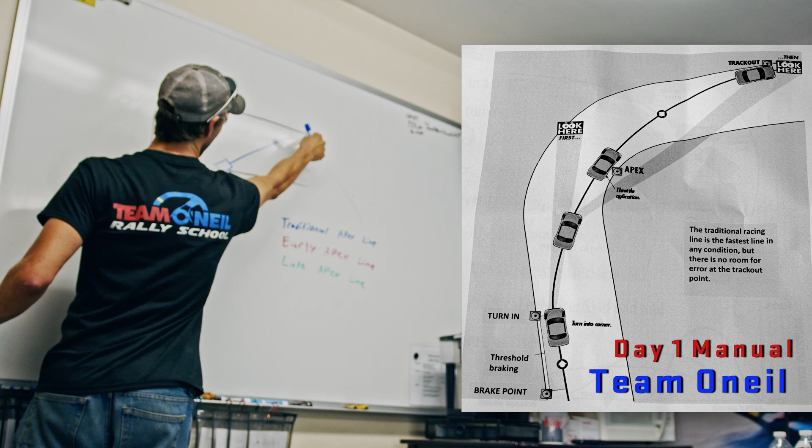So without a doubt, this opens that corner up and straightens it out as much as possible. If you knew the situation, knew the road and all that stuff, this would be your fastest way through the corner. The problem is road racing sees the same 10 corners 100 times. In rally, we see 1,000 corners once.

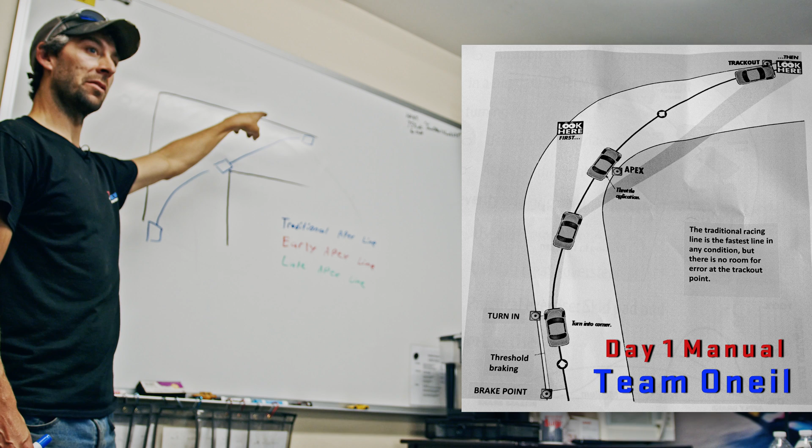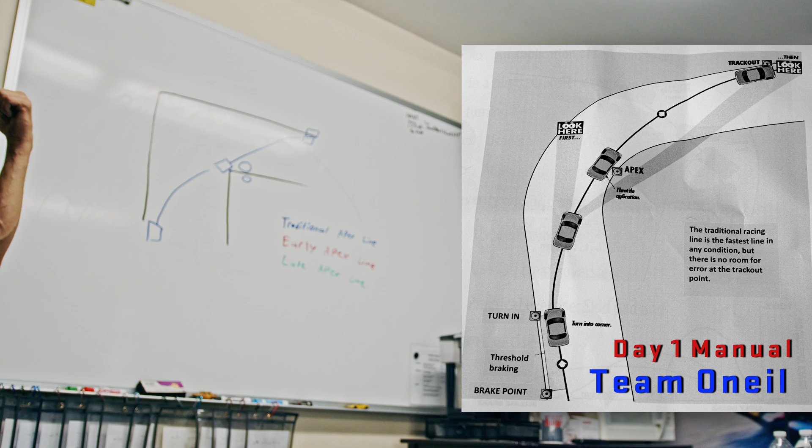So you typically don't know what's on the other side of that. So when you use this line, if there's some trees creating a little shade on the road, and there's a slick spot - I know you guys felt some different changes of material out in the slalom and skid pad area - you come into that, you don't account for that little spot, you misjudge your speed into it. Goodbye. Now you're off the road. And is that okay? No, because now you're breaking rule number 1 and probably rule number 2 as well. You're going off the road.

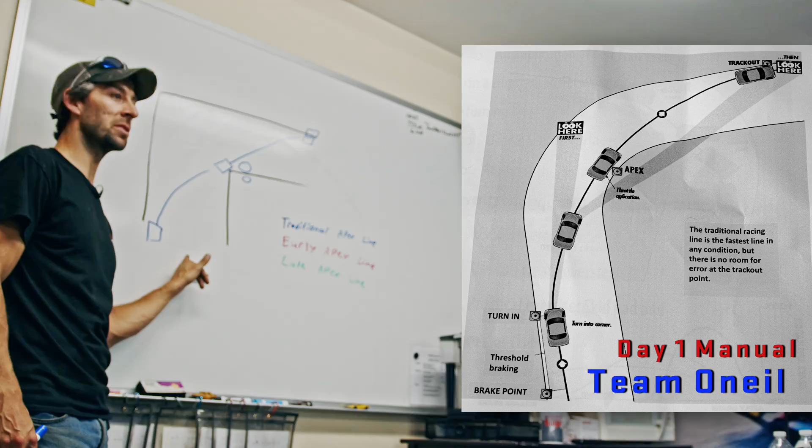So this line can be the fastest, but it's not going to get you to the finish on most events. You might get away with it for 9 out of 10 corners, but that 10th turn is going to screw you over every single time. So this isn't our safest line. Can be the quickest, but not our safest.

We actually try not to use it too much, because the other thing - you guys have seen the slalom - it's right, left, a lot of back gravel roads, there's a lot of turns going the other direction. If this thing starts switching on me the other way, is he set up good for that next left-hander now? No. So that's another reason why we stay away from this line.

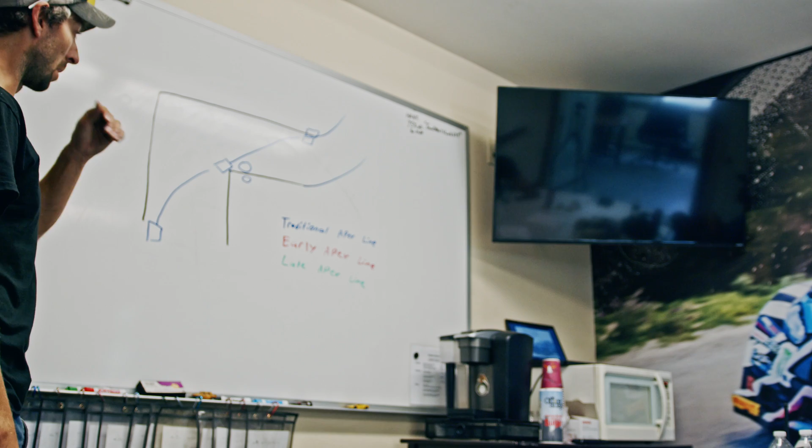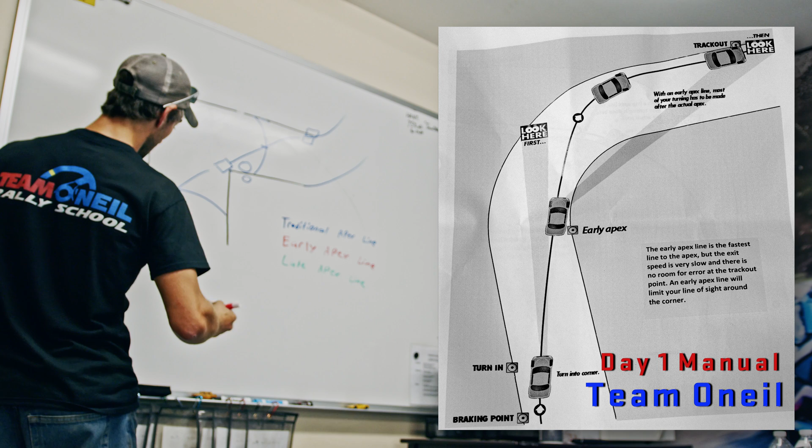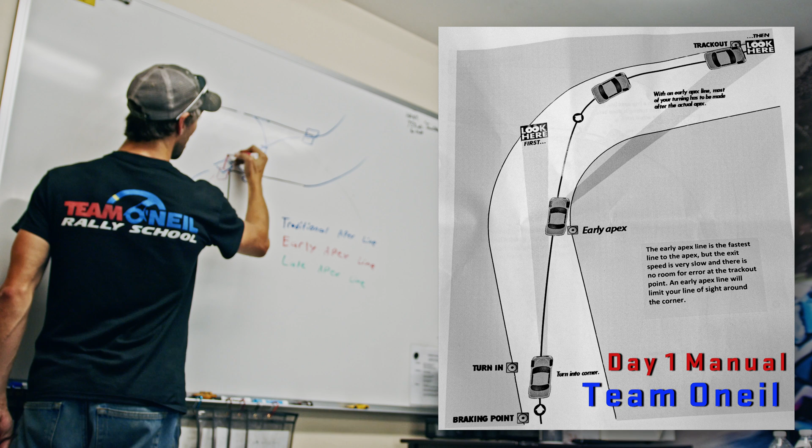An early apex. I draw this in red for a reason, because it's the worst line you can do. Like red, bad, crash, stopping. So when you come into this, you start out at the same spot on the outside, but then you end up going to this apex and clipping it a little bit early. And then you have to do all your turning after the corner, which also keeps you on the outside of the road.

So we've already talked about all the reasons why you don't want to be on the outside on the exit. The entry, there's a little bit of pros and cons to this - the pro, from this point to this point, you could be faster, right? Because you drive that in on a straighter line. The con, again, you have to try to turn everything on after that apex.

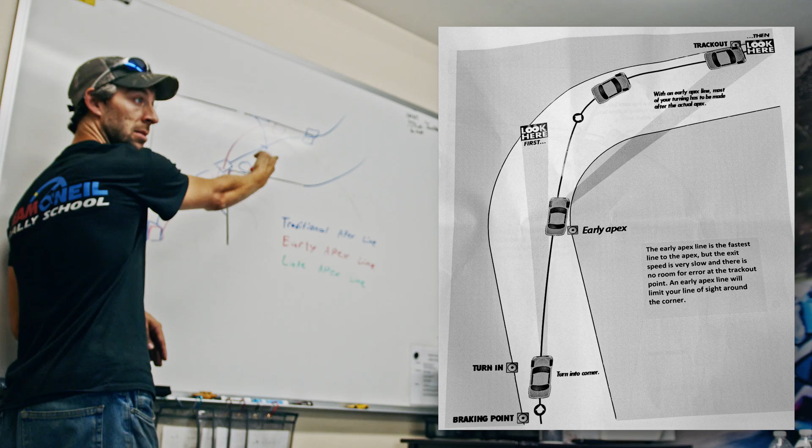The other con - if this was a big mountain, you know, we're in New England, there's mountains everywhere, a lot of blind corners - your visibility, when you come in tighter, is less. You can't actually see through that mountain. So your visibility is only to here. So if there's a little object or obstacle coming around that on the exit, you're not gonna be able to see it in time.

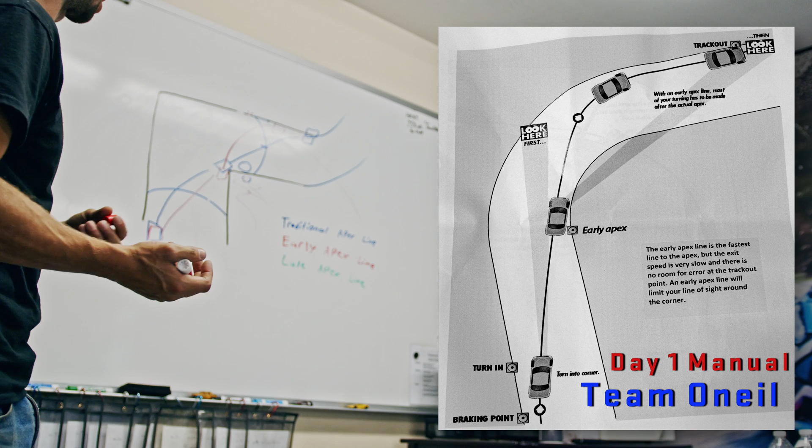So we call this the crash line because it's gonna be the least safe out of any of them. We do have to chat about it though, because what's a big thing that can cause this line in the slalom? If you're looking right here.

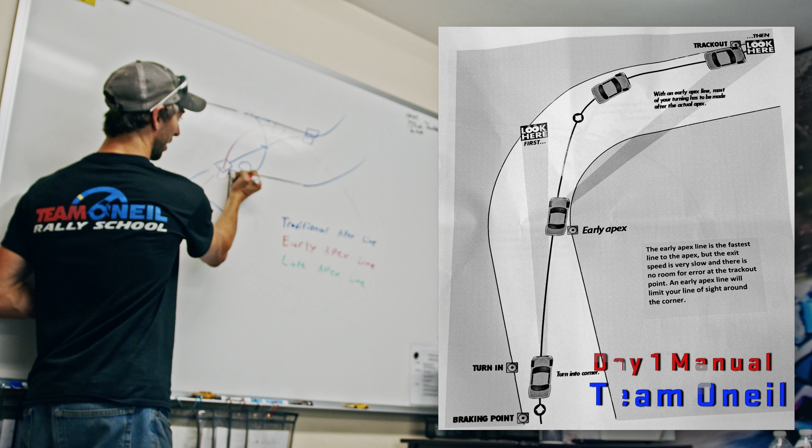Anyone stare at an orange cone this morning? Yeah, right? Did you go right to it? Yeah. Run it over? Yeah. So that causes an early apex. So if you end up looking at your apex, it's gonna track you in early every single time, and then that's gonna screw your line for that next corner coming up, in the late apex line.

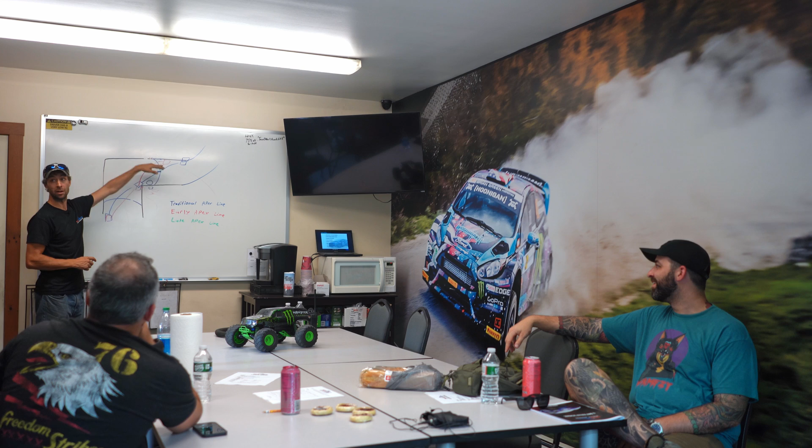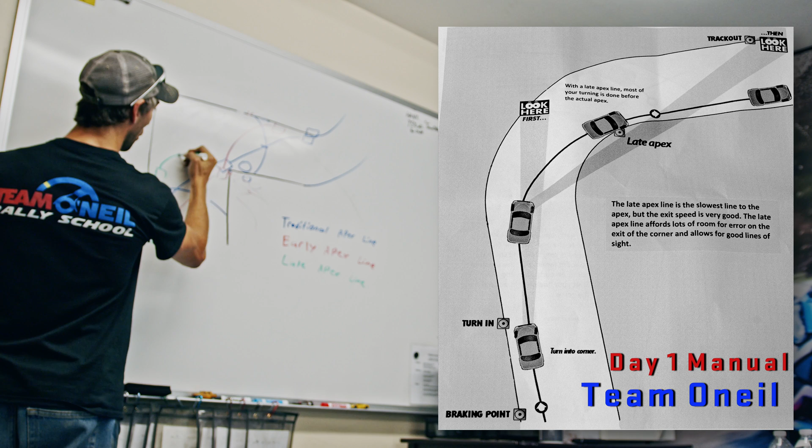So you're still starting out wide at the beginning. You actually come in a little bit slower because you want to get all your turning done before the corner, and you're clipping the back side of that cone. So you're on the very back edge of that corner.

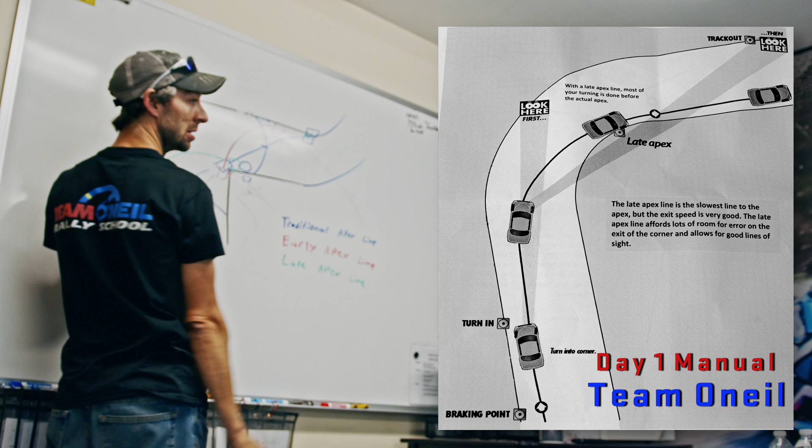So now, by being out wider at the beginning of it, your visibility through the corner is way further, so you can see objects coming around if there is something in the road later on. You also leave a lot of room for error here. If you misjudge your grip a little bit, you have that much room to play with.

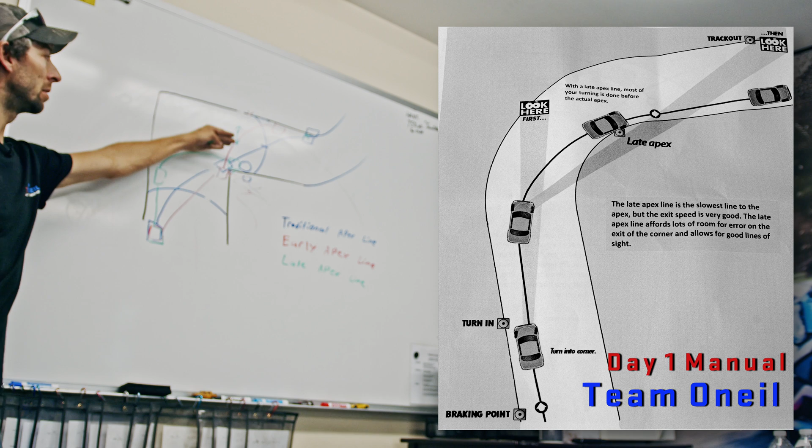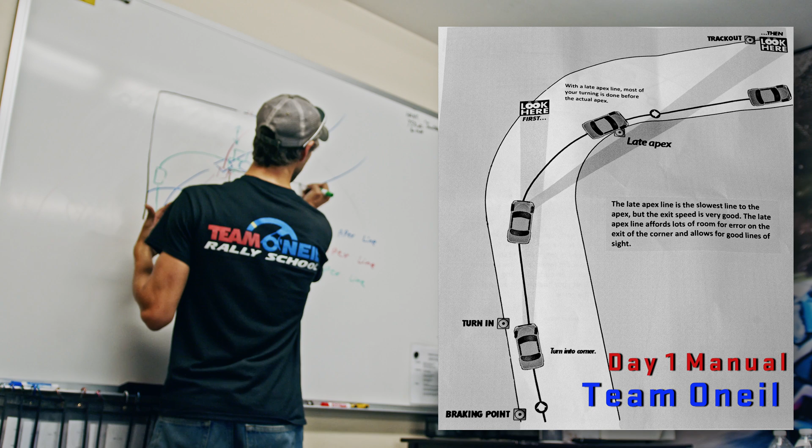So if you do miss it, and then you're here, guess what? You're still on the road, right? So that's gonna be the safest line, and it's gonna be the most predictable line. But you also think about here now, if this corner went the other direction on you, he's much better prepared for that next left-hander. If it did ever become a situation where the road straightened out on you, well, guess what?

It's a lot easier to get a car to understeer to the outside and use more road than it is to try to tuck a car back in if you're already on the outside of it, because gravity's automatically trying to push you to the outside.

All right, let's put a big blue 18-wheeler coming around the other side. You don't know he's over there. So which line am I gonna actually run that's gonna help me stay safe on the inside of that corner?

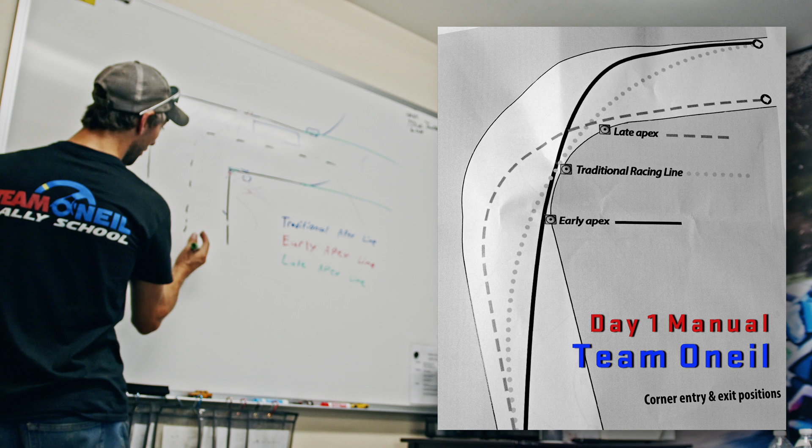That late apex, right? So if you can see this whole straightaway, it's not the end of the world to kind of cheat out a little bit. I do it all the time coming down Mansell because you know there's nothing there.

But the spot you really want to make sure you're squared away is on the blind side of that turn. So if you ran a traditional line, that's going to make you track out on the exit. Well, again, if you misjudge a little grip, you're probably gonna go head on with an 18-wheeler.

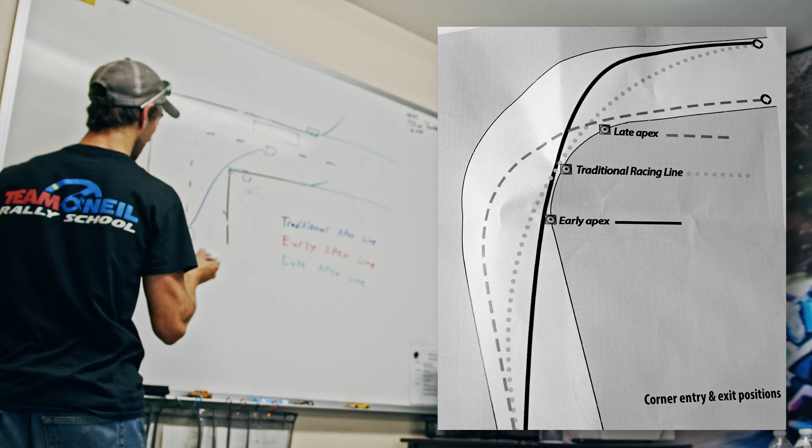That early apex line, you drive straight in, and then you now have to get all your turn done. You're even more likely to go head on with that 18-wheeler because you also can't see it coming, it's much more blind. You also made the corner a lot sharper.

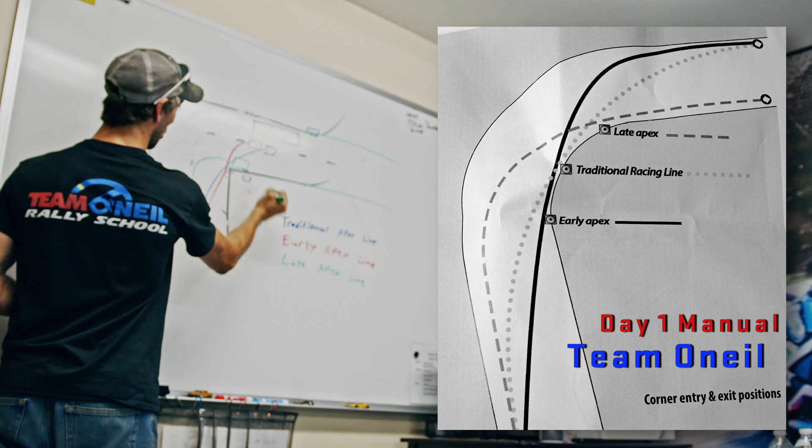So you run that late apex line, you cheat out, you slow up a little bit more on entry, and then again you exit more on the inside, then you're not scaring the shit out of yourself, the passenger, whatever it may be. How we're gonna apply this.

So now it's actually gonna be a little bit more important to help keep you on a late apex line, because when you come out of the corner, again, you're exiting tight because it's a late apex. You actually wanna try to line up that white piece of tape that's on the wheel with the next outside green cone.

And that's gonna keep you on a good late apex going all the way through. So again, you wanna start out wide, and then just as a refresher, what do I do? What's my technique? Start it with the brake. There you go, turn. Brake.

There we go. Then center. Now we're talking. Then take the foot off the brake after you're centered. There you go. See, now you guys are learning, that's good. I didn't forget. Just make sure you hold that brake in too, nice and long. You're holding that brake in a little bit longer now.

Said the drone can do 100, it sounds like a challenge.

So now we've put more offset on the cones. We've made the corners longer to force you guys to run a good line to make it through. So now you're gonna have to be even longer on your brake because again, the corners are longer. So holding that brake in, and again, you wanna try to exit tight behind that cone.

And then you center, as you guys already mentioned, before you release the brake. And again, try to make sure you get that wheel pointed at that next outside green cone, and that will keep you on a good line. And to help with visualizing going through, this will kind of be your road, like that, all the way through that corner.

All right, so I'm lining up with this green cone. I'm gonna get ready, I'm looking across already. Turn, then brake, center, then release. Turn, brake, center, release brake. Turn, brake, center, release it.